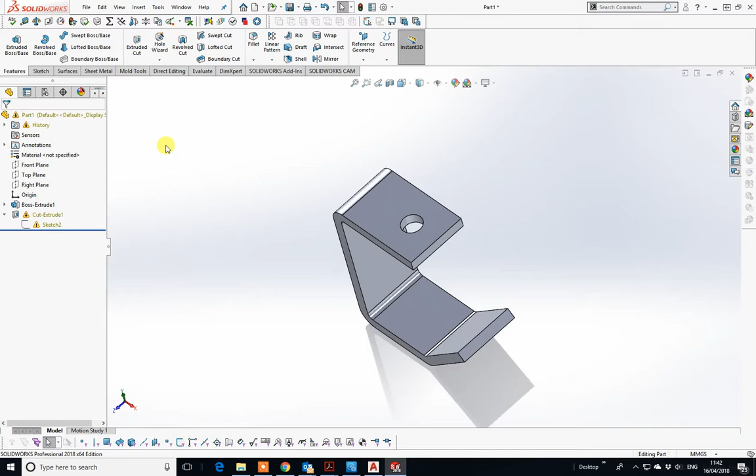So again, I'm going to go to File, New, Part. Okay, that one. Now, don't forget, which I didn't do the last one, you must save. So I'm just going to go File, Save As. Okay, and it's already in Part 2, so I'm going to call this the crank arm. So I'll just type in crank arm as a part. And again, I'm going to go to Sketch.

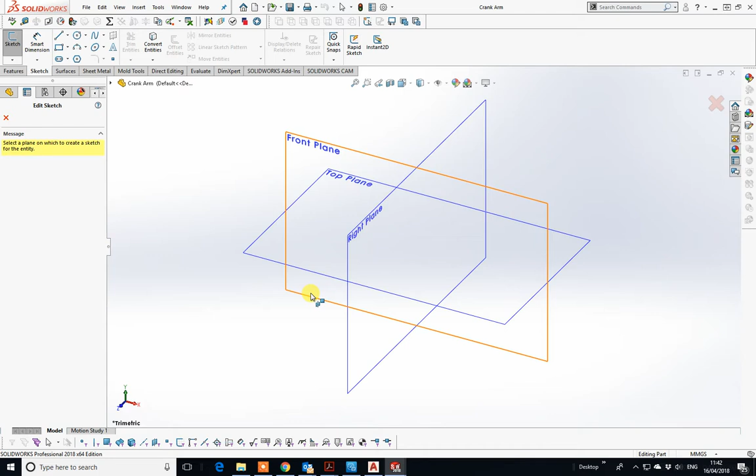I'm going to pick the top plane this time because this comes down from above. Now you'll see from the handout you've got, I have a rectangular piece. And again, you can do this in several ways, but be very, very careful with where your datum line is for actually marking stuff out. So you remember from the last one, my 0 points. I'm just going to draw a line for a sketch. Now I could actually use a corner rectangle tool, which actually I am going to do.

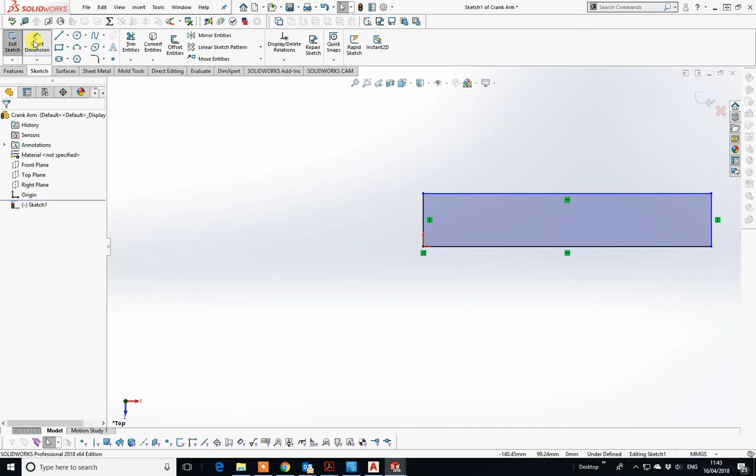So I'm just going to pick on that point there, and you see I can actually just rough out my actual part. But also notice there's only 2 lines that are actually black, which means they are defined. To actually make them fully defined, I've got to put some dimensions on this. Go Smart Dimensions, that bottom one there to that one there. And we know from the drawing that I've given you that's 19.05. And don't forget that these dimensions are pretty odd because it's been converted from inches.

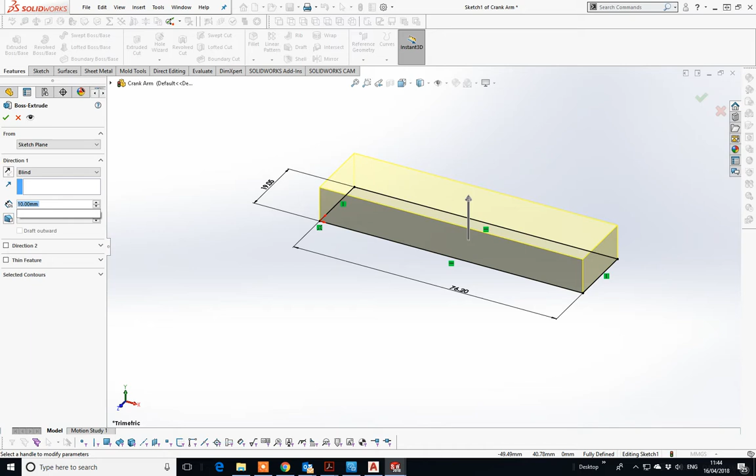I'm going to put another dimension in for the length. Okay, and we know that that is 76.20. So we have our crank arm there, but we need to put some holes in first. We can either do this now or later. I'm going to first of all actually make it a feature. So go to Features, Extrude Boss Base, and we know that that thickness is 6.35, and there we go. Perfect. So I've got my block there to start with.

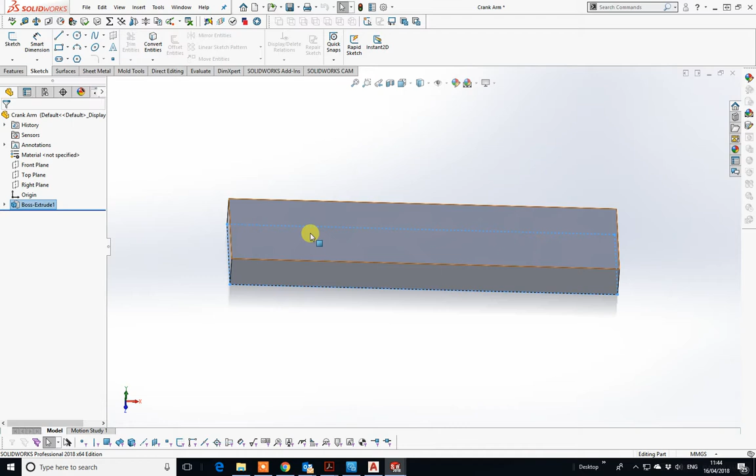Press the space bar, come down to my plan view, and I see I've got 2 sets of holes there. So I'm going to do several things here. I'm going to put some construction lines in. So I'm going to go to Sketch. Now remember what I said in terms you can actually use a feature face as a plane. So just click on there. So I want to draw on that top plane. And I want to sketch. So I'm going to put a center line in.

Because I can pick up on the midpoint there, I'm just going to come slightly out of that and go through all the way there. So it won't be defined because I haven't picked up anything. If I move that endpoint to there, see it goes black because I've actually got that reference point. So I'll do that. Okay, so that's my center line. I also know that I actually have a line, okay, that is

9.53 off there. So again, Smart Dimensions from that end to that end, and put in a dimension of 9.53. Press enter. Okay, and I also know that I've got one the other side as well. Now I could mirror that over, but I'm just for now going to put a center line in right about there to there. Okay, and again another Smart Dimension in there to there.

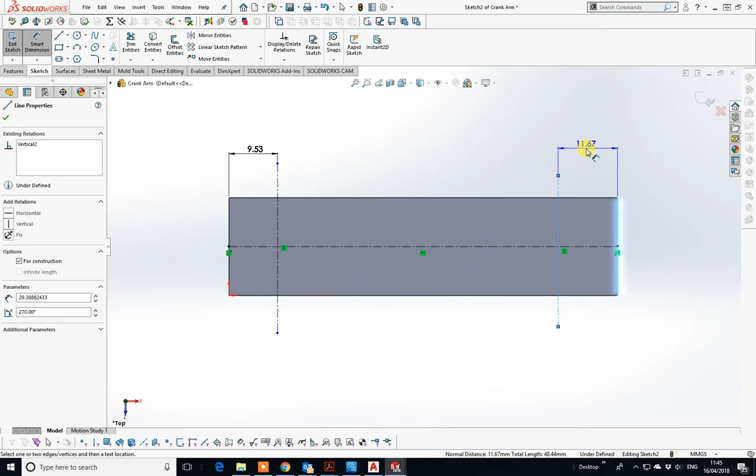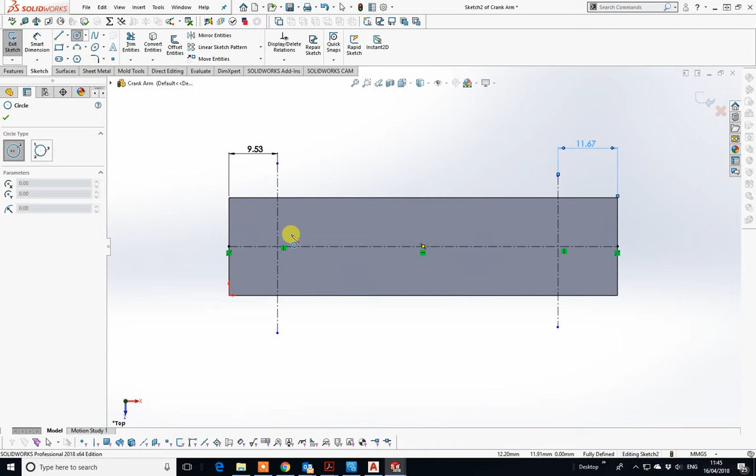Now to be honest, I don't really need to have that center line in. I could actually just put a circular line in. Now I know also, as we knew before, that center line is 9.53 up as well. But I'm going to go to my circle tool. I'm going to draw a circle around about there. Now you notice that I can pick that up and move it about. Now normally what I would do is maybe just draw that circle on the line without 9.53. I'll do that.

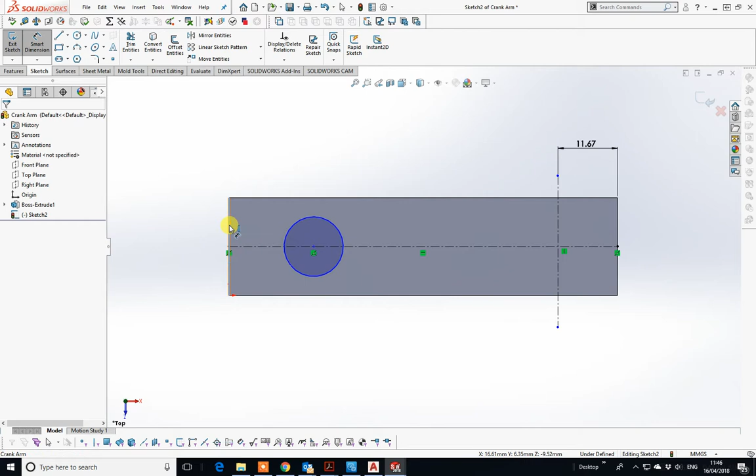So if I just delete that line out, okay, it's taken the dimensions out. I'm going to drop that onto there. See how it's locked onto there? If I now go Smart Dimension from that line to that line, and then put in 9.53, you'll notice that moves. Now to get it to go black, I just need to put a diameter on there. Now, from your drawing, I don't actually have the diameter on there, but if you go to the

crank arm knob drawing, no jokes please, you'll see that that actually has a dimension on it of 4.57. So I'm going to put in 4.57. Now, good thing about Solidworks, you can change this later on if that changes. So I'm just going to agree to that.

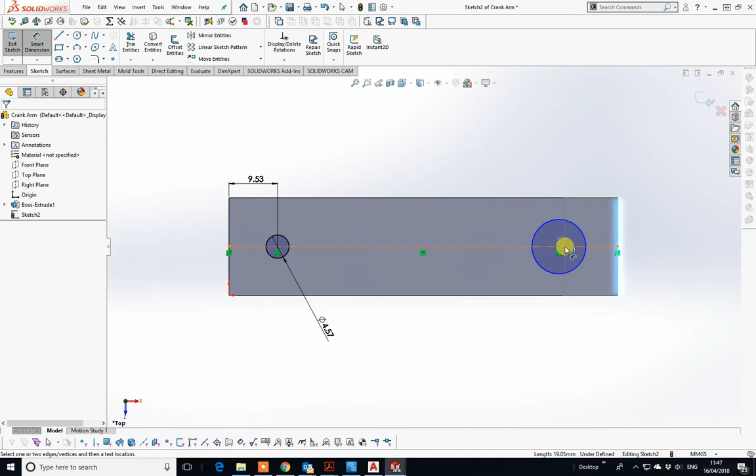Now I'm also going to put another circle on the other side. So I'm going to just delete that line there. Okay. And draw another circle on that line there. Now I know the centre again is 9.53. So smart dimension from there to there, and put in 9.53. Okay, and the diameter of that is 6. Oh, it's a radius this time.

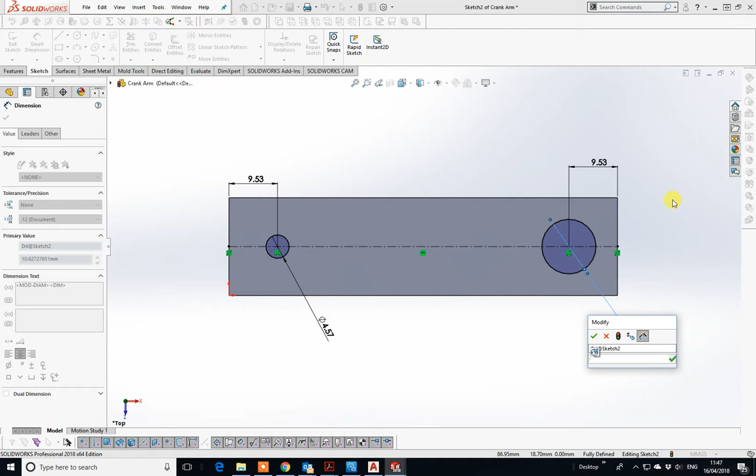Okay, now to do the radius, you can actually type in R and put in 6.35, and it tells you it doesn't like it. Okay. Well, what you can do, because it's diameter, if I just type that in, I can put 6.35 times 2. There, 12.7. You can use that box as a sort of calculation box.

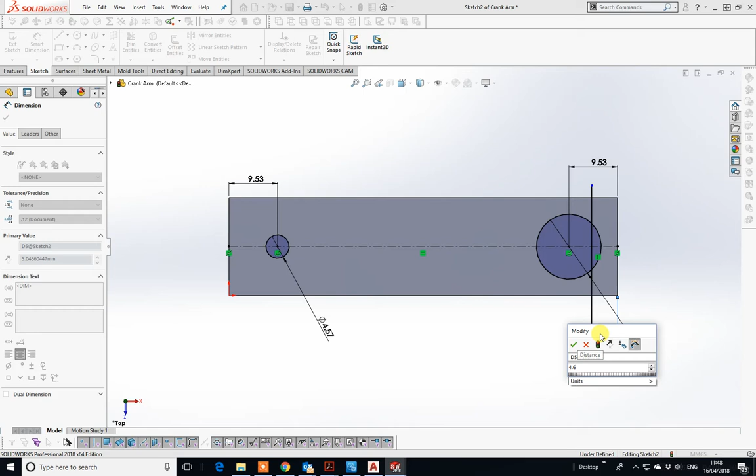Right, I'm going to put a line in, because you'll notice there is a flat within this down there, and we know that is 4.64. So smart dimension from there to there, and we know that is 4.64. Okay, now I'm going to use the trim tool for the first time. So up at the top here, trim entities, click on it. Now it says power trim. I want a power trim because I'm on a power trip.

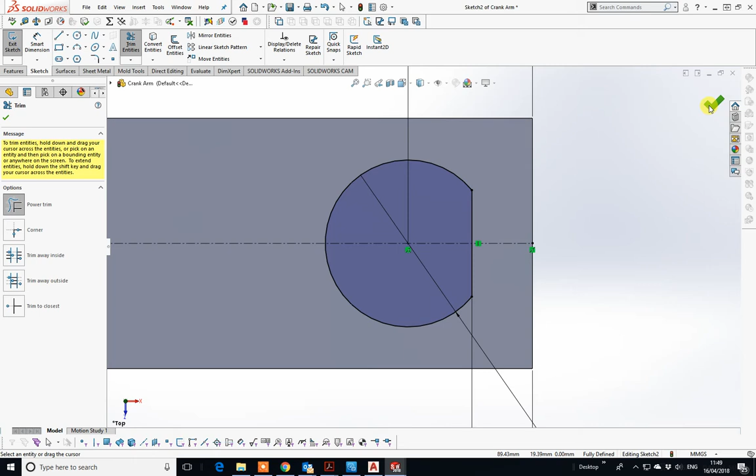So all I need to do is go through there, and go through there. So you click and drag it, and if I zoom in, circle, take that away, take that away. Careful not to take that centre line away. So you'll notice now that I have 2 blued out, not greyed out sections. So what do I do now? I go to features and I go to extrude cut.

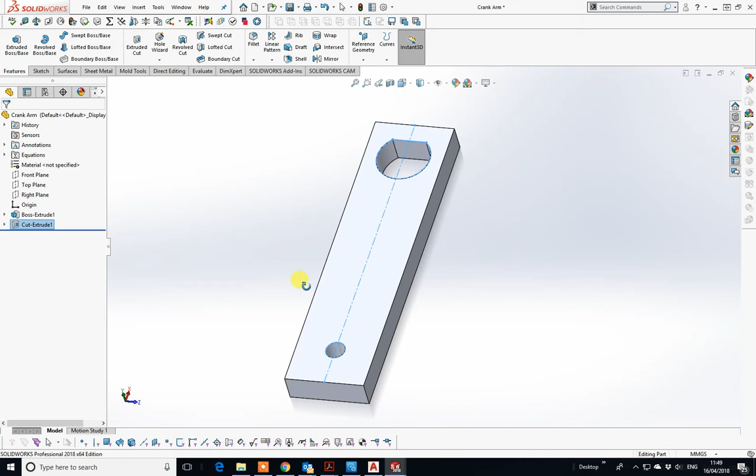And if you'll notice, that would go all the way through. So what I would say is through all, just to make sure, give that a tick, and there we have my parts. Okay, very simple piece to do. So we shall now move on to the next part. Don't forget to save.